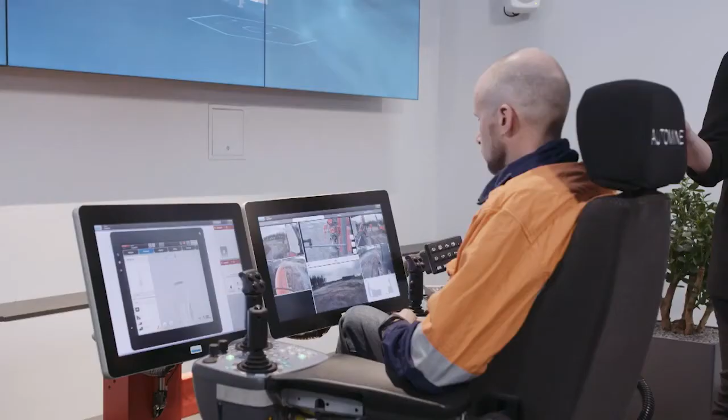Hi everyone, my name is Mervi Helminen and I work as area manager for surface boom drills. With me I have our operator Sami Jartti. Right now we are in our AutoMine showroom, which is located in our test mine in Tampere, Finland. We usually have hundreds of customers visit this room on a yearly basis.

This room is dedicated for demonstrating the capabilities of our AutoMine product family. The AutoMine product family covers all aspects of automation, from remote and autonomous operation of a single piece of equipment to multi-machine control and full fleet automation. The product family consists of two product subgroups, AutoMine Underground and AutoMine Surface Drilling. They both allow customers to scale up automation at their own pace.

Today we will be focusing on our AutoMine Surface Drilling offering. It is an automation system for autonomous and remote operation for Sandvik I-Series surface drill rigs. It aims at improving safety, reducing cost and increasing production. With the help of the autonomous drilling cycle, one operator can control a fleet of drill rigs.

Autonomous drilling can be performed at a remote operator station that can be located anywhere. Now we will show you how we control two Leopard DI650i drill rigs located 2 kilometers away from the comfort of this showroom.

Leopard DI650i is an intelligent high-pressure down-the-hole drill rig for demanding high-capacity production drilling applications in surface mining and large-scale quarry applications. The hole size range is from 115 mm to 229 mm. Leopard DI650i with intelligent platform enables scalable automation and can be adjusted according to customer needs, always up to the highest level automation systems.

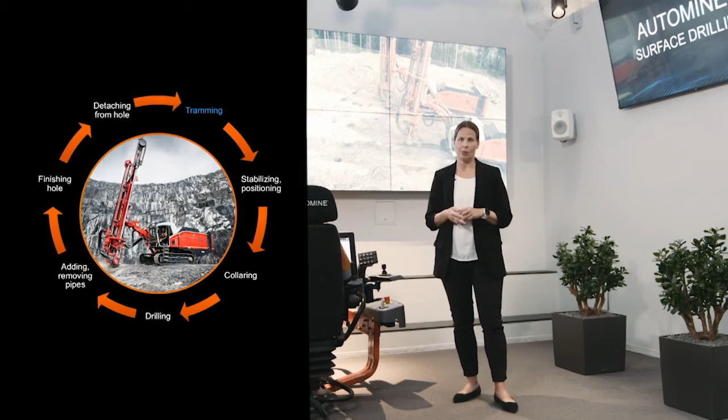Operator selects the sequence of the holes to be drilled from the assigned drill plan. The rig autonomously trams to the next hole using the TIM3D drill navigation and autonomous tramming system to reach the correct drilling spot.

Once the drill rig is on the correct drilling spot, first the carrier is stabilized. The large coverage area and boom reach of the Leopard DI650i support the automatic feed beam alignment and positioning, which in turn ensures accurate hole positioning according to the drill plan.

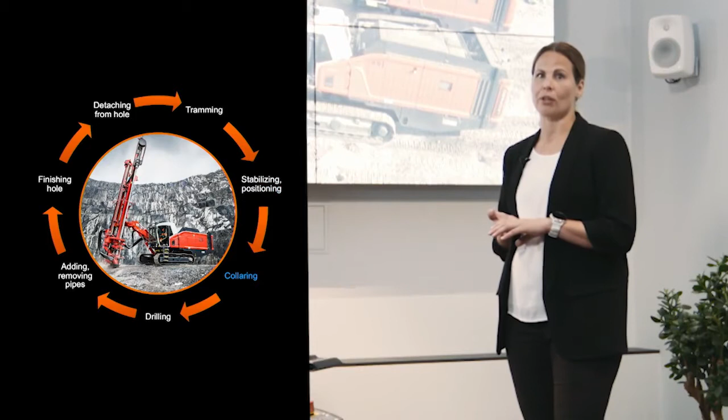The intelligent collaring sequence takes care of perfect hole start. Guide jaws are automatically adjusted to hammer size. Automatic adjustment of low pressure and feed levels optimizes the performance when collaring, making sure that drill hole quality stays at the perfect level.

With full power drilling, the iTorque drilling control system takes care of rotation torque and drilling parameters. The compressor flow control system maintains optimal airflow for the down-the-hole hammer in varying drilling conditions. Pipes will be automatically added until the set drilling depth is reached.

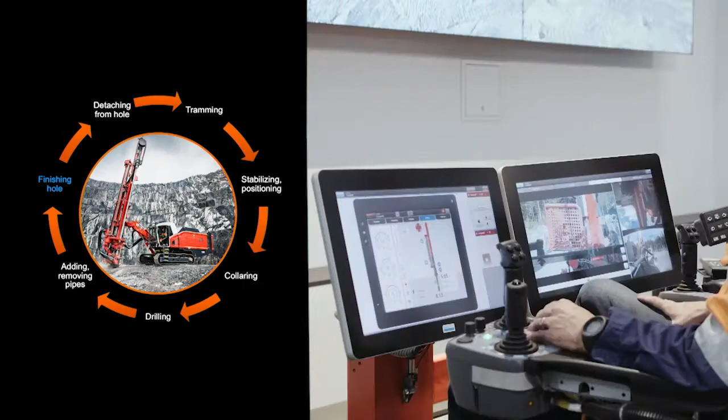After reaching the desired hole depth, the intelligent hole finishing sequence takes care of all steps of finishing the hole in the correct way. It ensures faster and more accurate hole finishing and pipe handling. When the drilling is finished, pipes will be automatically removed, and the rig will prepare to move to the next hole as per the planned drilling sequence. The cycle is now completed and the next one can begin.

What do you think? Pretty impressive, right? This game-changing technology is also available for rotary drills. We will now show you some pre-recorded footage from Alachua of how the AutoMine surface drilling system works with rotary drills.

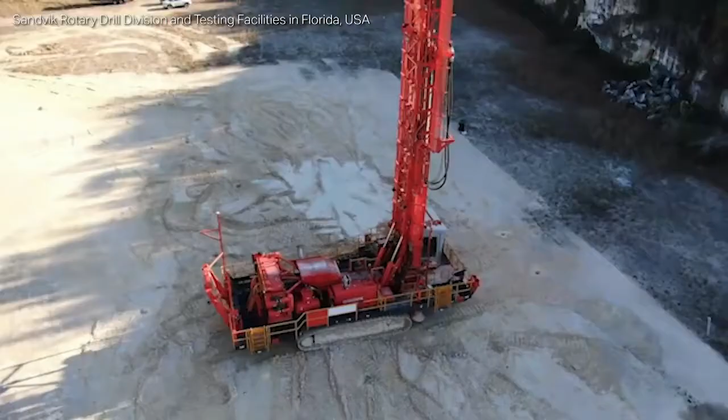With automine surface drilling, you can maximize productivity and safety while increasing drilling efficiency.

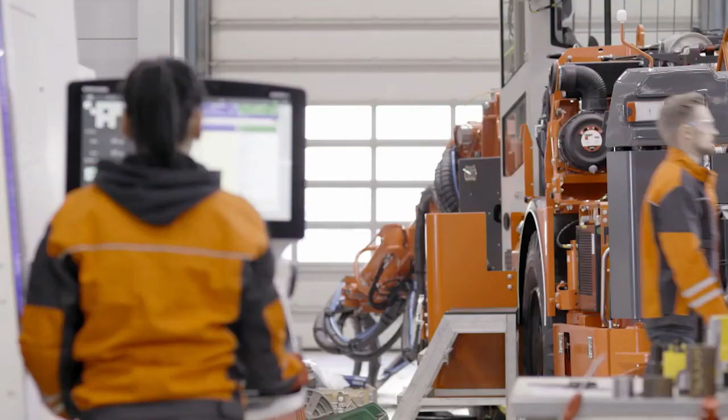On the other hand, we have exclusive expertise, because we are the OEM, with years of experience and knowledge about mining machines and equipment. As an in-house digital services developer, we know the machines and their features thoroughly. This means we can tailor our services to offer exactly the information and features the machines, their owners and their operators need. Hey, very impressive.

Thank you for that. But hey, at the moment, we are in the Productivity and Reliability Center of Sandvik, and this is a very exciting place. Could you give us a sneak peek onto what goes on here? Especially how does your team get connected to your local monitoring specialists around the world?

Sure. You can get the main idea by just looking around here. This is a team of highly skilled data scientists specializing in work related to reliability issues of our machines. They're experienced in monitoring, interpreting, and modeling the big pool of data that we are receiving. They work hand in hand with the local monitoring specialists in the respective sales areas, providing 24-hour support and recommendations and preventative actions to avoid unplanned maintenance.

This looks really impressive, but I'd like to know, could you elaborate on the connection between the global and the local levels, and especially, could you tell us how you can deliver improvements based on data? Our global reliability center is strategically located here in Tampere, close to our equipment factories. But we also have local monitoring centers in the front line and sales areas, for example, Australia, Canada, Mexico.

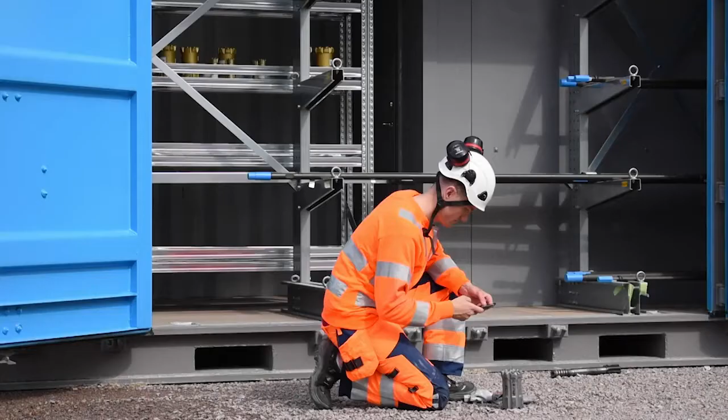So during the summer, my team came up with a unique solution to address this problem, taking advantage of what most people have, a phone with a camera. We created an app called Analyze. It allows all our customers, big and small, access to a Sandvik expert at any time and anywhere in the world, simply put, to understand the problem of a customer and provide recommendations in an application.

All these solutions are great and made even better when you can take advantage of those analytics, and those analytics could revolve around operator training, operator performance, how they use the rock tools.

Previously, before COVID was here, we would normally travel to a site and we'd have classroom training. That classroom training would essentially look at the basics of drilling and how we look after our rock tools. We would focus on percussion, feed, rotation, and air, and look at ways that benefit the operators, how they would use their rock tools more efficiently.

So all that has come to a halt in most countries, and we still see a need to train operators. We cannot do classroom training in a lot of countries, so we needed to find a solution that complements what we have, and we developed the remote training solution.

Essentially, we can train up to 6 operators from anywhere in the world at any time, as long as they have access to the internet and a device to train on. In this way, we can still teach people to use their rock tools correctly.

By taking advantage of the digital tools and solutions we've created, we can impart knowledge onto the sites through your operators to reduce your total drilling cost. And as we say in Sandvik Rock Tools, you'll never work alone.

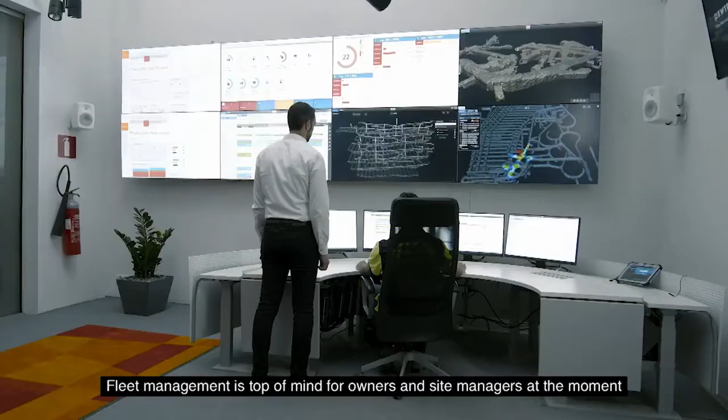Fleet management is top of mind for owners and site managers at the moment, and it has a high-level purpose in the mining and quarry industry. The data from software and sensors is aggregated to give a big picture overview of what's going on. But fleet management software doesn't directly address those with operational roles of the equipment.

Operators are the day-to-day users of the crushing and screening equipment. They are in the trenches, both literally and figuratively. And maintenance managers support the operators indirectly by keeping the equipment in running condition in order to help them deliver the correct amount at the correct time. These are the people keeping the crushing and screening plants running.

When we visit these plants, we normally find that cross-team communication is done with what's at hand and what's available. This could be whiteboards, computer screens, post-it notes, Excel files, emails, and even the use of WhatsApp on personal smartphones for quick communication. Operators, like all of us, use the tools that they're most comfortable with. And I can't count the amount of times I've downloaded an app only to delete it again in a matter of minutes because it was hard to use or comprehend, or it didn't add value to my life.

As consumers, we've all seen firsthand how technology has made a massive impact on our daily lives. 20 years ago, finding a song, movie, or even some basic information online was like going into the Wild West. You never really knew what you were getting or where it was actually coming from. Now we download countless numbers of apps onto our smartphones and computers that make our lives easier and more enjoyable. Netflix, WhatsApp, Spotify, the list goes on and on.

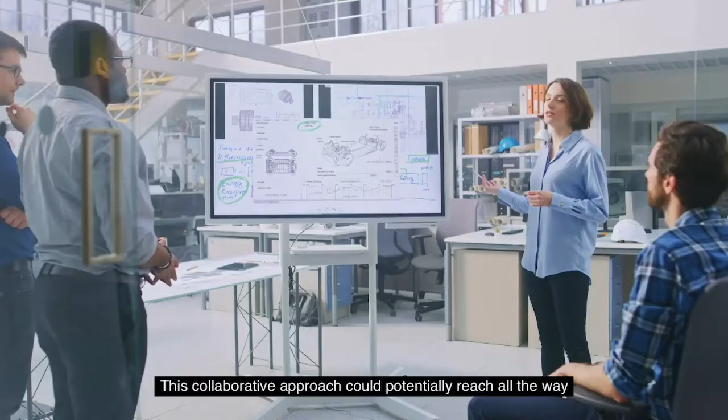If our experts and customers have access to the same tools, they can speak the same language when collaborating. It would provide a better baseline for building knowledge and resolving problems, increasing the lifespan of your equipment. This collaborative approach could potentially reach all the way into our research and development process, creating better, more reliable, and stronger equipment.

And we can't talk about the future of technology without talking about artificial intelligence. Tesla, one of the most prominent drivers of AI technology, has stated that as of February 2020, their cars have driven over 3 billion miles. That data is then used to make their system even smarter, creating a never-ending positive feedback loop that is beneficial not only for Tesla and their drivers, but for everyone that shares the road with their products.

Now, what if we could use AI in mines and quarries to predict your crusher performance, or whether there is an opportunity to increase the output? This positive feedback approach could grow exponentially with the input we would receive from Sandvik customers and machines from all around the world. It would start with a secure, controlled pool of data points from the connected equipment, which would allow us to take a positive feedback approach that could potentially improve productivity for your connected crushers and for connected crushers everywhere, just like the Tesla example.

These are just a few of the ambitious goals that Sandvik has for the future. And soon, we'll be introducing you to a smarter, more dynamic way of working.

And we have the very dynamic Petra Sundström with us. So good to see you again.

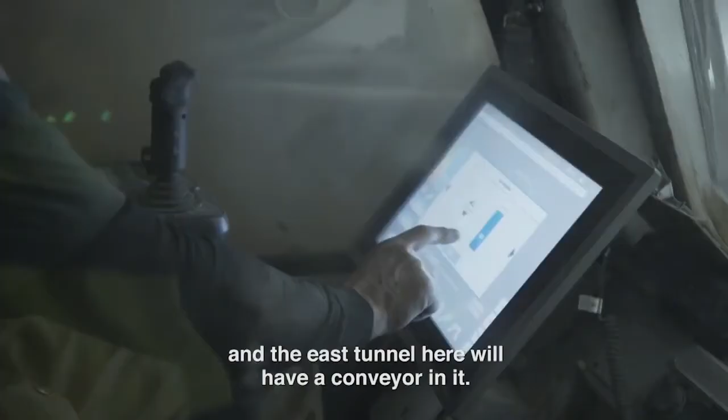The purpose is for Barrick to be able to go deeper, eliminate the high-cost truck haulage out of the existing portals. And the east tunnel here will have a conveyor in it that conveys their rock out at a much cheaper price per ton.

The lead man on this crew, after he first cut with the AutoCut, and Darren's a 30-year mining guy, said, I hate to admit it, but I finally found something electronic that can do a job better than I can. He said, I love the AutoCut, because it just gives you a perfect profile.

So in that application, the system was used to cut a decline where accuracy was obviously very crucial. Have you also used the Cartronic system in a production environment yet? Yes, it's been implemented with other applications too.

For example, we've used it in the German underground salt mines with a roadheader, where the machine is cutting a full sump cycle fully automatically. But here again, I would like to show you a short version of a customer testimonial.

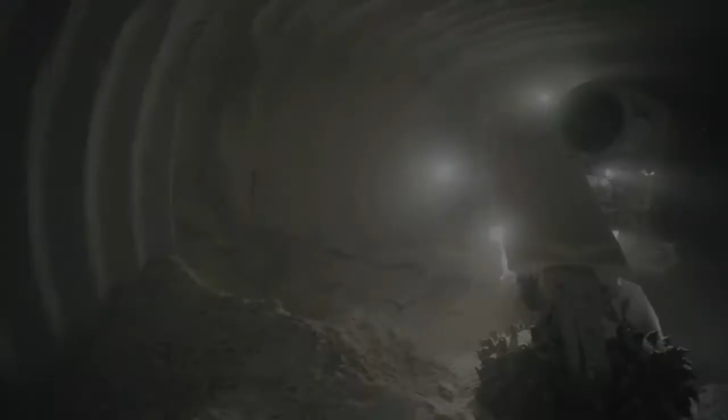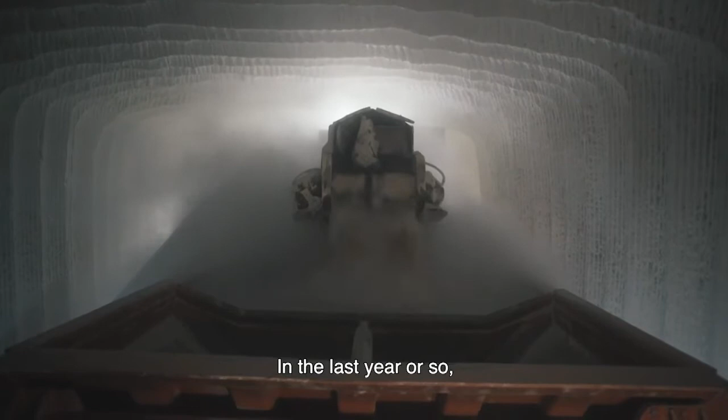So in addition to the fully automatic cutting cycle, we have also implemented a cutting path planning tool, which helps our customers individually plan and optimize the way the cross-section is cut. On top of that, we've implemented a fast profiling tool, which helps especially in tunneling applications where accuracy is of utmost importance. Finally, the Cartronic system increases machine lifetime because it optimizes the way the machines are used, always at nominal levels. Let me show you an illustration of another application where the Cartronic system is implemented on an MB770 bolter miner.

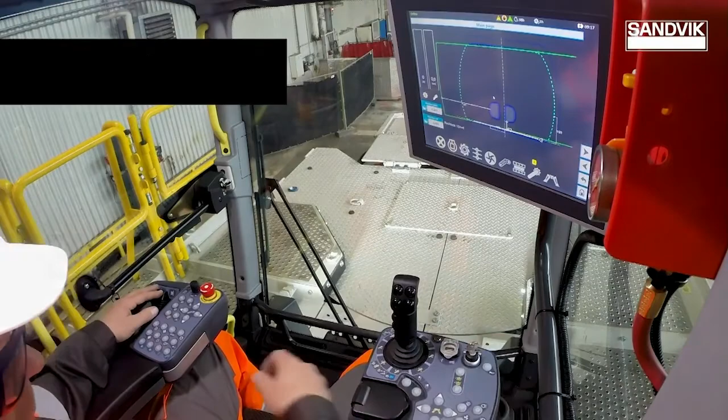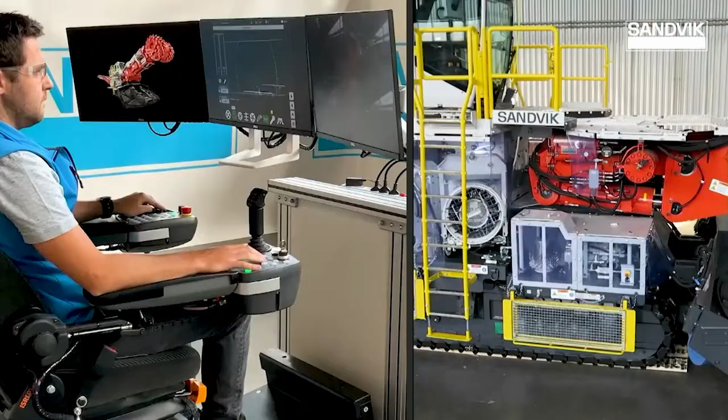Here you see how a roadheader is operated the standard way. On the machine you have a 3-way button which is turned to the tele-remote operation position. Then the operator takes off the key and leaves the cabin. The machine operator takes over control on surface and sets up the machine underground for cutting operation. He trams the machine forward to the tunnel face, puts the rear stabilizers and the loading table down to the tunnel floor, and then he initiates the Cartronic system for automated cutting of 1 full cycle.

When the Cartronic is in action, he takes off his hands from the controls and leans back into the comfortable operator seat. Now you see how smart and easy it is to become a roadheader operator in the future, when you are going to use the tele-remote operation feature now available for your mechanical cutting machines.

Finally, Jürgen, should we speak now about connected equipment, analytics and process optimization? Definitely. We have been working on remote monitoring for several months now. The logical steps when it comes to remote monitoring are as follows: get visibility of your equipment, connect equipment and access data, establish equipment communication either live or at regular intervals.

Then you need to put the data into context and gain service intelligence to help protect and enhance the relationship with the customer and ensure customer satisfaction.

In my view, data on its own does not add much value. It's important to visualize the data in a meaningful context, for example as key performance indicators and alerts. Here in mechanical cutting, we strongly believe we need to pull information from different types of systems in order to understand the whole picture when it comes to system health status, as well as machine availability and performance.

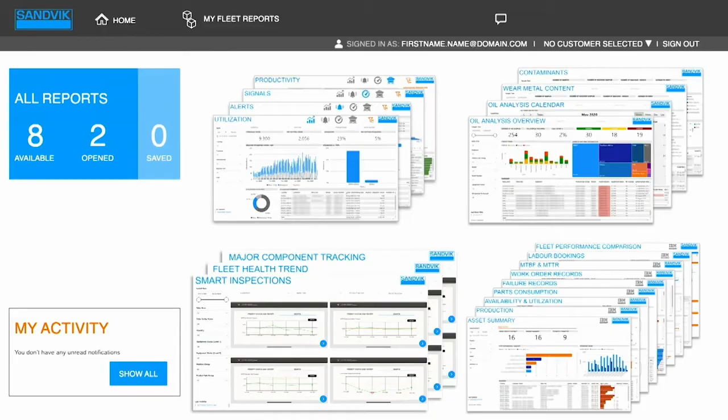To sum it up, with this type of new digital service, the customer can take control of their fleet through remote monitoring and Sandvik's service excellence.

Thank you all for your attention.

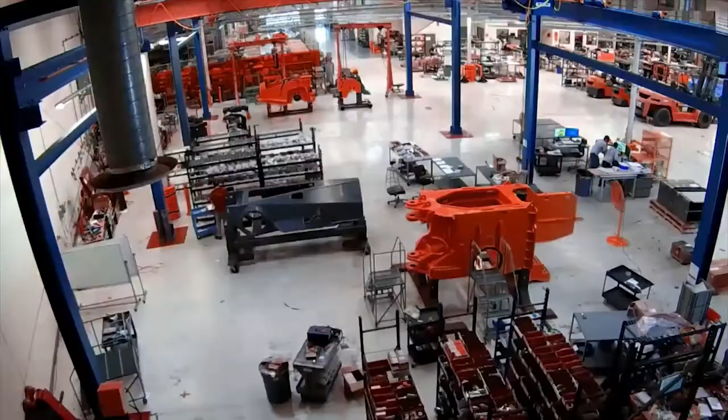We spent 18 years developing battery-powered vehicle solutions. Our systems work in the real world, and when it comes to mining, we have a decade of actual production use underground. That makes us the most experienced BEV team in the mining industry. Combine that with Sandvik's ability to manufacture and support global-ready product, and you can see how the future of underground mining is here today.

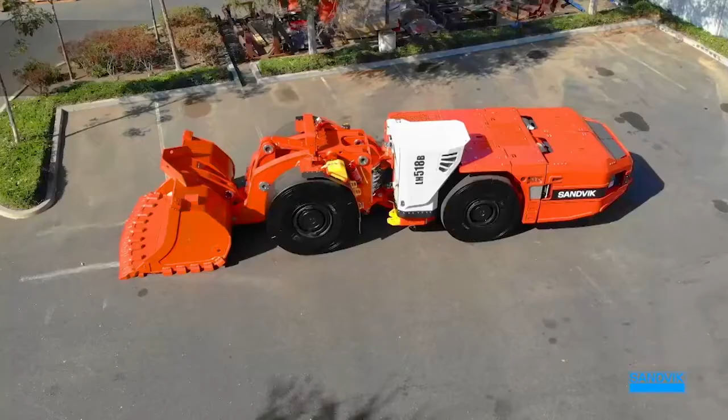I'm now going to turn it over to our VP of Engineering, Kyle Hickey, to tell you more about the features of this amazing new machine. This new machine is a result of Artisan's innovative approach and battery system experience, matched with Sandvik's decades of engineering expertise.

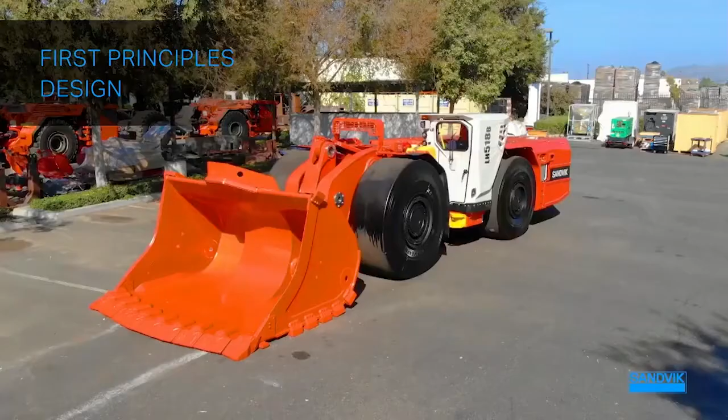We design our machines based on a first principles foundation. Artisan looks at underground mining from a fresh perspective, and we look for ways to leverage the latest technologies in a way that is best suited to solve the unique challenges of this industry. Our design philosophy is centered around productivity first. This is illustrated in our focus on reliability, system redundancy, and cycle optimization.

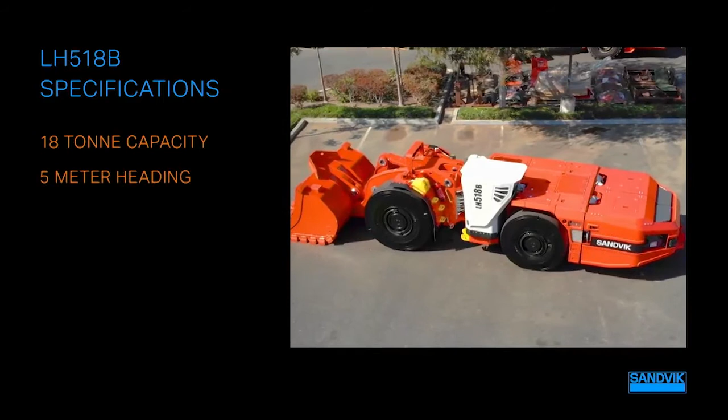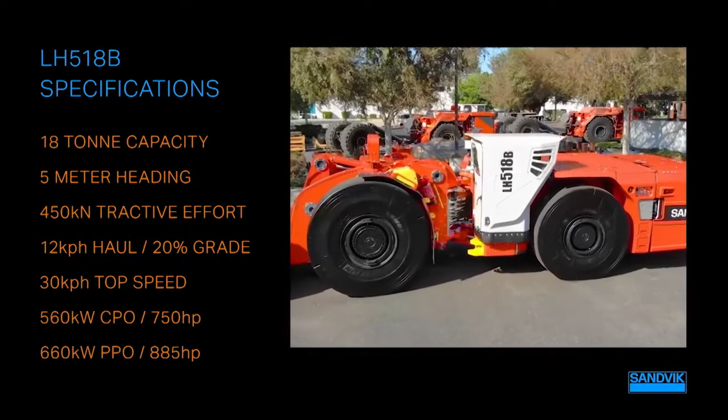Some of the main specifications for the LH518B are an 18-tonne capacity designed for a 5-meter heading. It has 450 kilonewtons of tractive effort. It can do 12 kilometers per hour fully loaded on a 20% grade. It has a 30 kilometer per hour top speed. The machine has 560 kilowatts of continuous power output, which is 750 horsepower, and a peak power output of 660 kilowatts, or 885 horsepower. This machine also has a state-of-the-art operator cabin.

The LH518B utilizes a patented battery swapping system. This system allows the operator to drop off an empty battery and pick up a fully charged battery without getting out of the cabin, allowing for the fastest machine refueling in the industry. The battery system also incorporates a stability system, allowing the battery to be dropped off in any location without any prepared infrastructure. The high voltage battery connections are automated, allowing for the connections to the battery to be done from inside the cabin, significantly decreasing the battery swapping time.

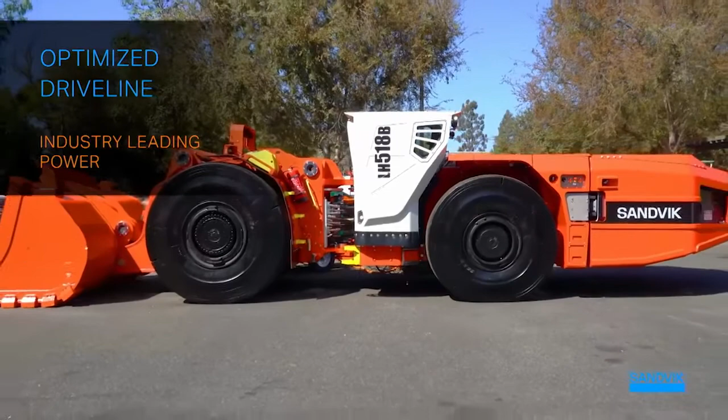The LH518B uses an optimized single-speed driveline design, providing an industry-leading peak power output of 660 kilowatts, pushing the machine up a 20% grade at over 12 kilometers per hour.

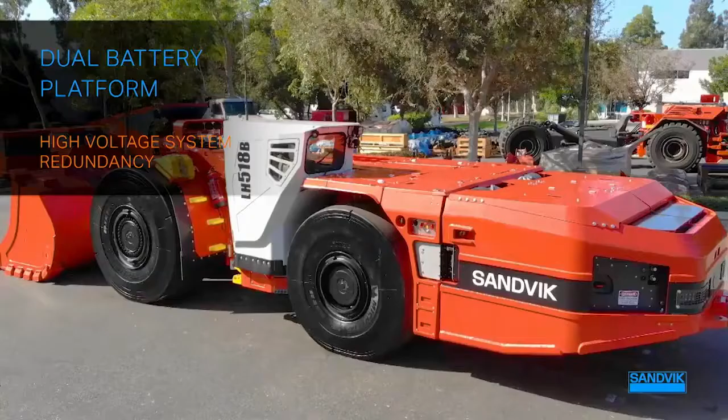Artisan's dual battery platform offers many advantages. The system optimizes efficiency and reliability by offering complete high-voltage system redundancy. In the unlikely event of an issue with one of the high-voltage systems, the machine can operate at 75% of nominal capacity from a single battery. This ensures increased uptime and ensures that the machine never gets stuck in an inconvenient location.

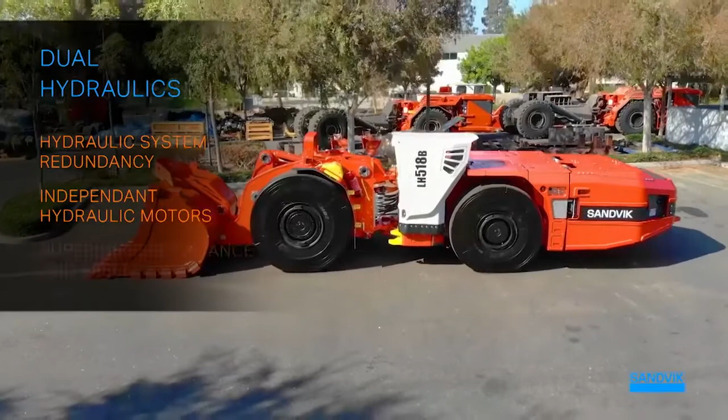Along with our redundant battery architecture, the machine also features redundant primary hydraulic pumps. This allows for increased efficiency and reliability. Because the hydraulic pumps are driven from independent motors, the machine does not lose any tractive power when the hydraulics are engaged at full power. This results in far superior mucking performance and cycle time.

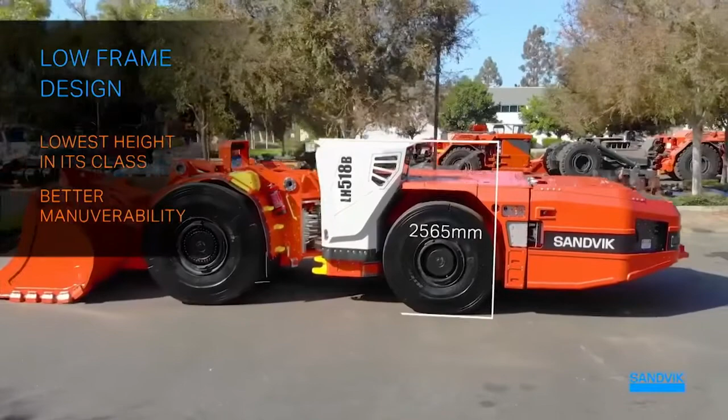The LH518B has been designed with a low overall frame height. This frame height is significantly lower than other machines in this class. This provides for better maneuverability in low back height applications while increasing stability. The use of smaller diameter tires in the rear is an example of how this machine has been optimized for the application. The small rear tires allow for a lower frame height and increased operator visibility.

The LH518B is the world's most advanced battery electric loader. Gen 3, built from the ground up, packed with power and torque for unmatched efficiency and productivity. It's the only battery loader capable of dropping off and picking up its own battery, and it does that while the operator remains safe in the cabin. It will be a very welcome addition to your existing loader fleet.

Next, I'm going to turn it back over to Brian to address some common misconceptions about battery electric vehicles. One common misconception is that there's a real change to infrastructure needed to implement battery technology. The reality is, it's not as hard as you think. With our patented self-swapping system, you don't need a crane, which means you can save a lot on development of that infrastructure. It also means a new charging station can be redeployed and moved within the mine as your operation develops. They're small.

The charging system consists of 3 small cubes that can be transported quite easily, and they use common power infrastructure that's already in place. The other thing is that the swapping strategy means there's an extra battery that's always on the charger. That means the charge rate can be decreased to match the rate of consumption of the machine. So if you have a 3-hour runtime for your machine, you charge in 3 hours and the battery's ready for the swap. That really minimizes the impact on the electrical architecture and decreases your overall wear and tear on the battery as well.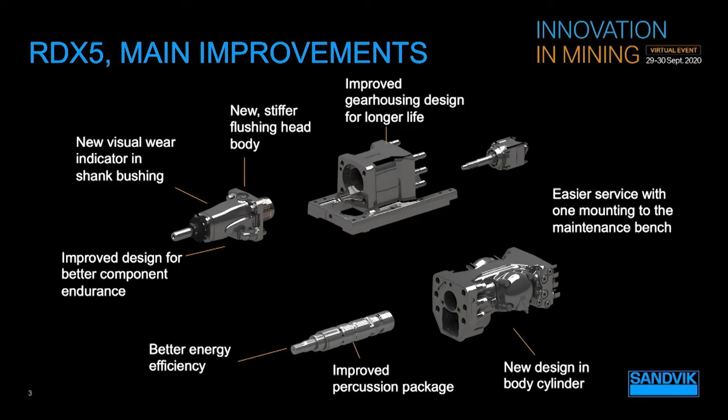For example, the service interval is now 750 hours instead of the earlier 500 hours. Also, drilling efficiency has improved. All this will reduce running costs and increase productivity. As a summary of all the changes, we can say it's the same good old workhorse, but made even better. Sounds great. So Jukka, could you take us through the RockPulse from a digital perspective?

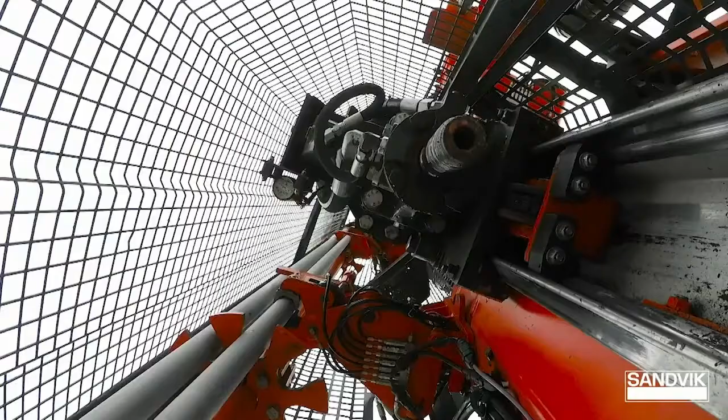Let's have a look at our RockPulse, which is a tool helping to drill right and get quality holes. This is the first practical solution for real-time tool stress monitoring in top hammer drilling. With this tool, one can avoid cases like underfeeding and overfeeding, which shows as improved tool life and hole quality. The system consists of a Sandvik shank adapter and rugged contactless sensor inside the rock drill, and it provides drilling status information for the operator.

Here you can see how the stress waves are traveling along the drill string to break rock. The RockPulse can read these stress waves in real time. It can visualize and alert the status of drilling on three key indicators: drill bit response, tools load, and feed level. The first one, drill bit response, measures the contact quality between the drill bit and the rock.

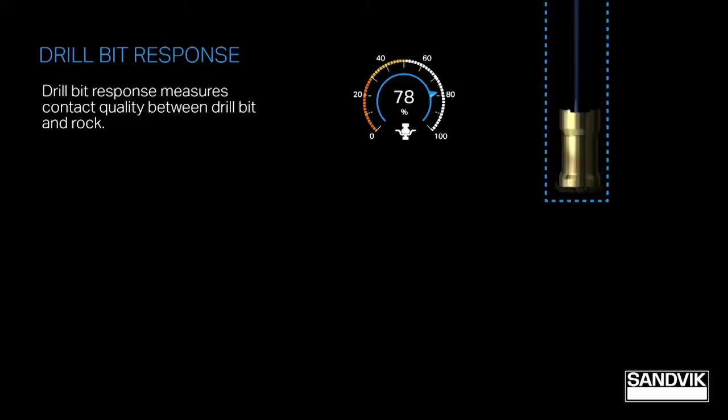This indicator shows whether you are actually hitting a rock or how much energy is being used to break a rock. A higher value here typically leads to a higher penetration rate. The second one, tools load, describes the amount of harmful tensile energy reflected back to the drill string from the rock interface. Low tools load helps the operator save tools and reduce cost.

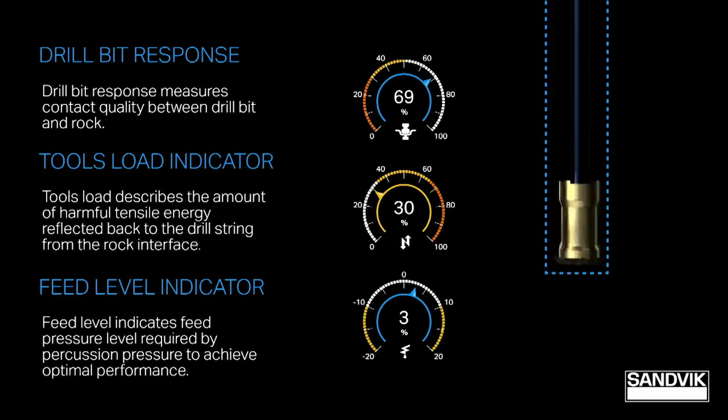The third one, feed level, indicates the feed pressure level required by the current percussion pressure to achieve optimum performance. The optimum feed level gives optimum drilling parameters and helps get straight holes. All in all, we can say that RockPulse helps take your drilling efficiency to another level, maximizing your production while cutting down costs.

Sounds like a great proposition. It is, thank you, Jukka. And now, Jukka, could you take us into the future, a sneak peek into the future please? Why not. Let's take the first one, Top Hammer XL.

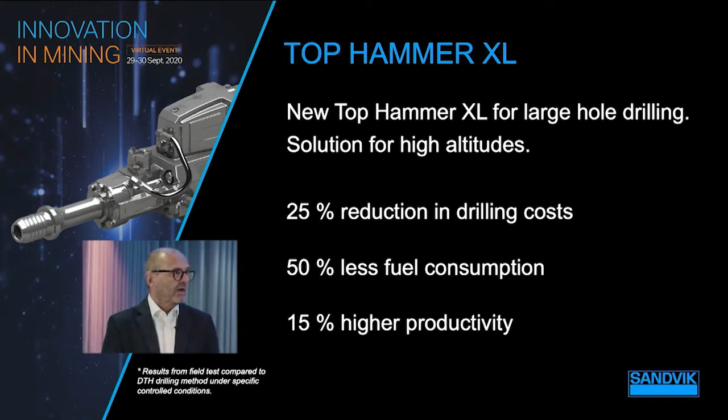We will soon introduce a new XL rock drill for large top hammer drilling. This is a rock drill which will expand the hole size, an excellent choice for mining contractors, which will also include a solution for high altitude operations. In this hole size, drilling means excellent efficiency, less fuel consumption, reduced cost, and improved penetration rate in large hole drilling. In other words, top performance in productivity and costs.

And Jukka, what about the future for the service part of this? We have built this field test lab to guarantee and confirm the quality of the rock drill service provided by Sandvik workshops. The lab will provide automated test reports which confirm the rock drill condition before and after the service.

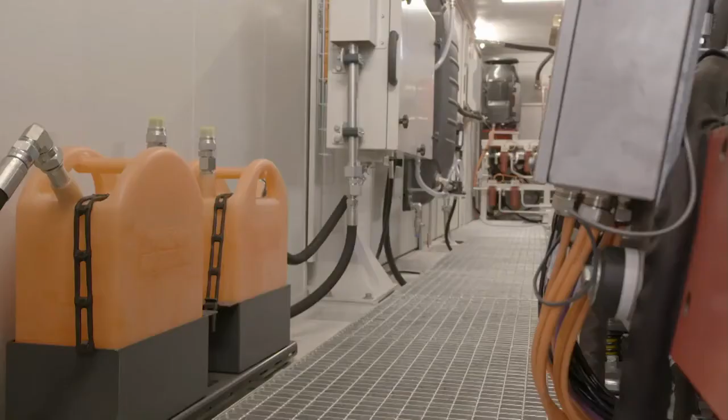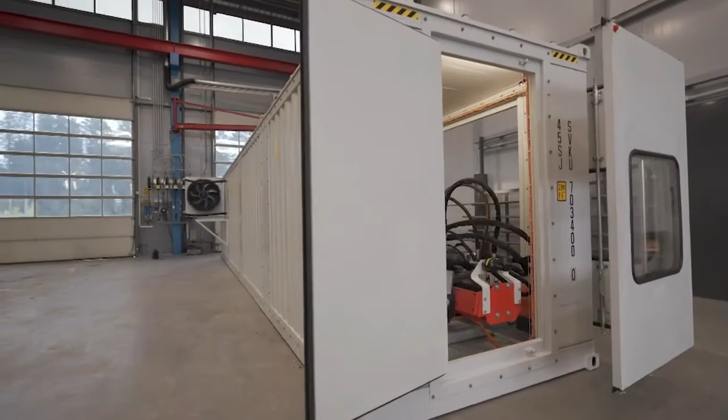It will include the data of general condition and its internal components. This is actually the only one on the market at the moment. The test lab is designed into the purpose-built container. It is movable and it can be placed indoors or outdoors.

So, gentlemen, what is your main message to customers? The main message we want to bring out is that we are constantly developing our products, and all our activities are targeting to help you, our customers, improve your drilling operations. For this work, we need your feedback and input to confirm that we are on the right path. With that said, we'd like to invite you to visit us, see better what we are doing, and talk with us. So you are most welcome to Tampere. Thank you.

Thank you, Jukka and Jukka. And it was indeed a pleasure to come once again to Tampere. I'm gonna miss you guys.

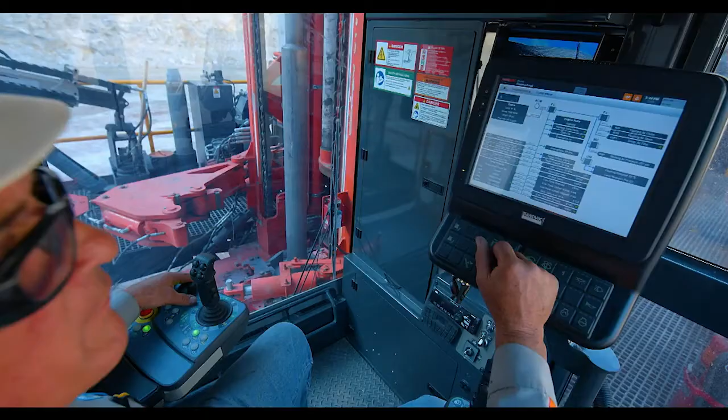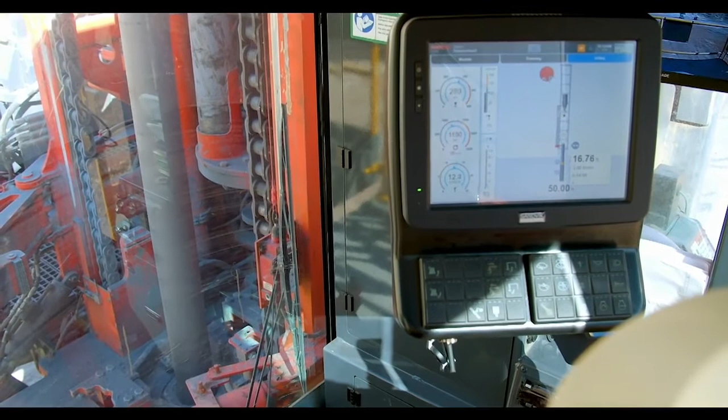We feel we've really managed to leverage the Sandvik SICA control system, which is the overarching control technology used on the I-Series products. That same architecture is used across all Sandvik I-Series products, in boom drills and underground equipment, etc. It's a common platform across all Sandvik equipment. The SICA control system's flexibility has really allowed our engineers to increase the operational efficiency of how the drill operates, and helps reduce our end customers' costs.

How did you identify a market need for a mid-sized rotary drill? Well, first of all, Sandvik's always been very active in this mid-sized market with our existing products. But what we've noticed over the years is a market trend to invest in bigger drills to do the same job, basically over-capitalising for the application requirements. We saw there was an opportunity to deliver a powerful, flexible, mid-sized drill to the market and reduce the need to go up in class and operational costs.

What role did customer feedback play in the development of this new rig? Globally, there was quite a number of customer forums prior to the development of the DR410i, across a range of commodity groups, from coal to metalliferous and gold and copper, etc. Also from mining companies as well as mining contractors, to establish exactly what they require and what were the key drivers for their businesses, and also for their local legislative requirements.

What were some of the key design criteria for this project?

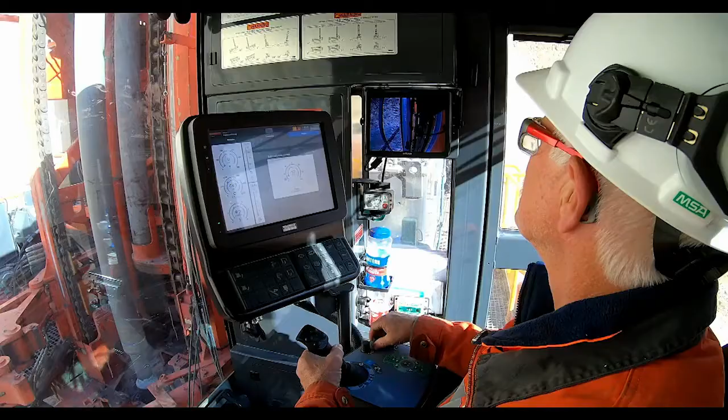On the efficiency side, a lot of work has been done increasing the hydraulic and pneumatic system efficiencies, reducing the actual horsepower requirements. On the operator environment front, we've developed a completely new I-Series ergonomic cab, which has in-seat controls and increased visibility for the operator of all the functions of the drill.

Recently, I was operating our test drill at a mine in Nevada, and I can honestly say the cab is the quietest drill cab I've ever been in.

Our I-Series drills are designed with 4 pillars in mind, and each of these pillars contribute to the overall TCO the drill can deliver. Can you walk us through the pillars? Yeah, certainly, Mary Beth. The foundation of the design of this drill was technology, productivity, maintainability, and sustainability.

On the technology front, we are focused on a technical solution that can add value to the complete excavation process, not just the drilling, from onboard operator assist functions that increase quality and repeatability of the operational cycle, to offboard remote systems and data delivery that can help enhance the downstream process of blasting, loading and hauling.

The productivity focus was on functionalities that actually increase the machine productivity, from leveraging the technology built into the machine, to increasing the single pass capability to a 14 metre clean hole as described before. All of these functions significantly assist in increasing the mine's productivity.

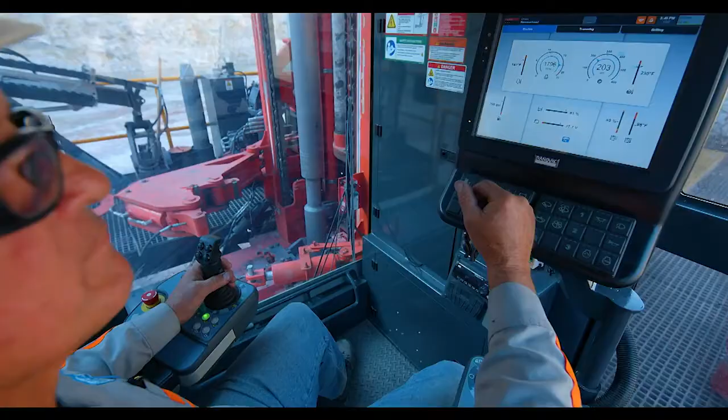As part of the SICA control system, we get intelligent diagnostics which are actually on board the machine. You don't require additional equipment to view them, and it really allows the mine technicians and maintenance people to quickly identify any faults or settings that might need to be adjusted.

From the sustainability perspective, with intelligent pump and power pack controls, the DR410i manages the entire system load to reduce the total energy consumption and the overall carbon footprint of the machine through reduced fuel burn.

And how does our latest I-Series rig help protect mine personnel? On the DR410i, we actually have a dedicated mast access ladder that provides easy access to mast components for inspection and maintenance. There's also certified tie-off points to address working at heights concerns.

Other functionality has been included as well, as we've gone to a non-rust FRP product, fiberglass reinforced grating, which is used throughout the machine to improve the footing and rust resistance of all the work areas.

There's also a patented deck wrench which allows bit change in conjunction with an optional remote control crane system. This eliminates manual bit handling and reduces the risk of potential injury for operators or maintenance personnel.

How does the DR410i help customers improve productivity? Well, from onboard automation features like auto drill and auto cycle, all help improve consistency and quality from hole to hole. The addition of the 14 metre mast concept means a lot of the mines actually won't be changing pipes to complete their drilling cycle, which will also help increase the productivity of the operation.

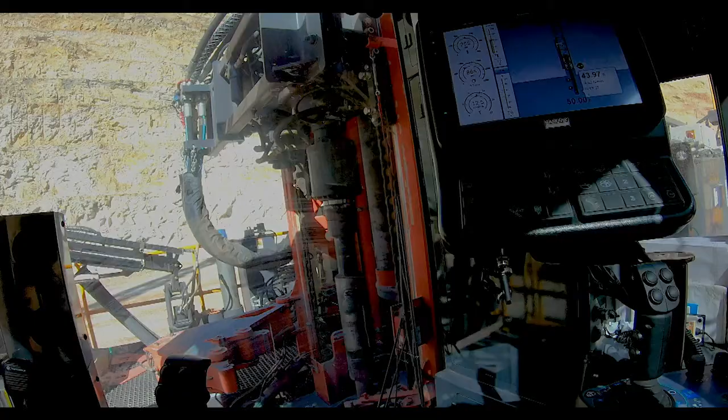We were very fortunate to have an excellent testing partner in Nevada, and it afforded us the luxury of having a long-term testing environment to work in. In fact, I think we drilled over 300,000 feet in the testing, and the machine has performed really well.

The client feedback on the rig has been really positive, and their inputs into the DR410i have really assisted us in developing this product. I was actually with a driller when I was last on site, and he described the drill as an engineering marvel compared to the equipment he's currently using.

The Sandvik DR410i is automation ready, but it's also a scalable solution, ranging from onboard automation that increases drilling efficiencies to fully autonomous operation that gives our customers the ultimate flexibility. It's designed to meet customer needs today, but also to help meet their future needs as they arrive tomorrow. The scalability is one of the biggest differences between our legacy blast hole drills and our new DR400i series equipment. You can use as much of the technology as you need now, knowing there's more available when and if you need it.

The technologies we're working with now are really driving mining towards complete fully autonomous cycles. This is coupled with a massive appetite for data to interconnect throughout the complete mining process. The future is an exciting time in the world of drilling. Sandvik will continue to be at the forefront of not only the smart equipment and smart tooling systems that go with that equipment, but importantly, the data management and the willingness to integrate with third-party systems in the whole mine ecosystem.

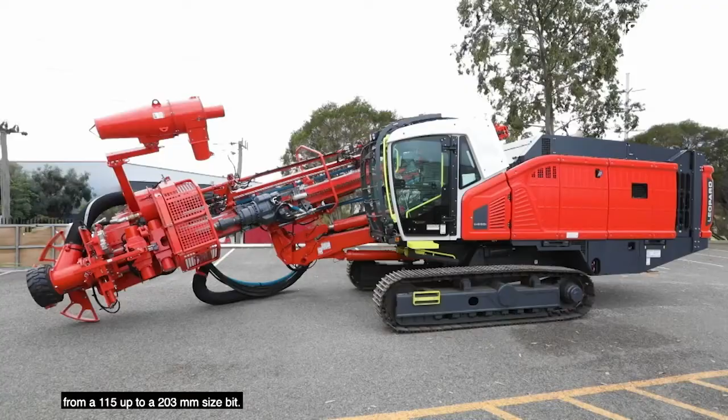SRG Global is a drill and blast company operating all over Australia. We chose the DI650i Leopard due to its capability, operator friendly, maintenance friendly, and it's a cost-effective machine to run. Very versatile - we can run the machine from 115 up to a 203mm size bit. We can bring emissions down, and we offer good savings with the machine with fuel savings and being able to reduce some of the labour costs on site.

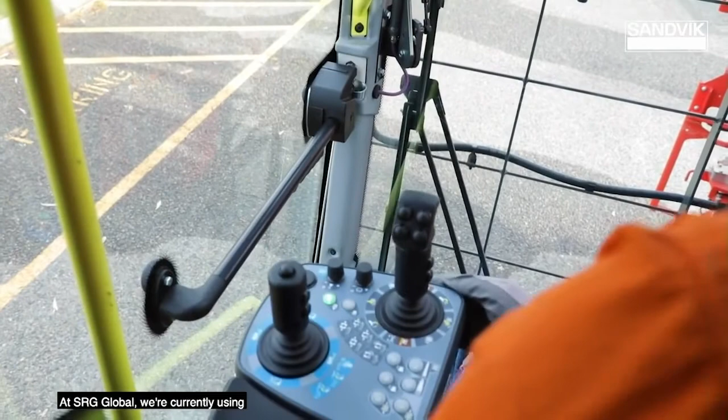At SRG Global, we're currently using the Sandvik TIM 3D hole navigation system. This helps improve the mine planning and gives us a better end result with our blasting and pattern design. So it puts us in the right area where the client wants us for quality assurance also.

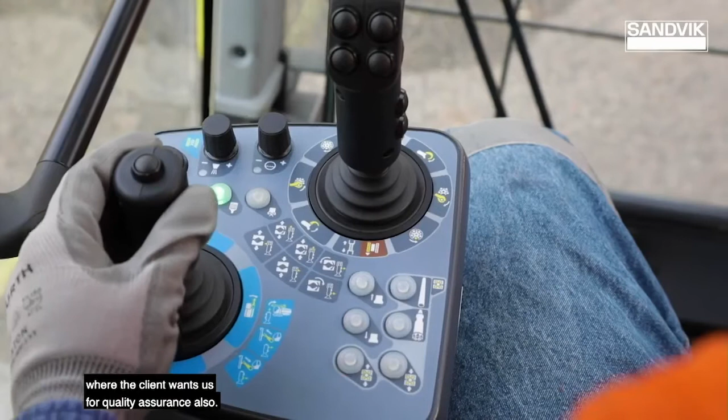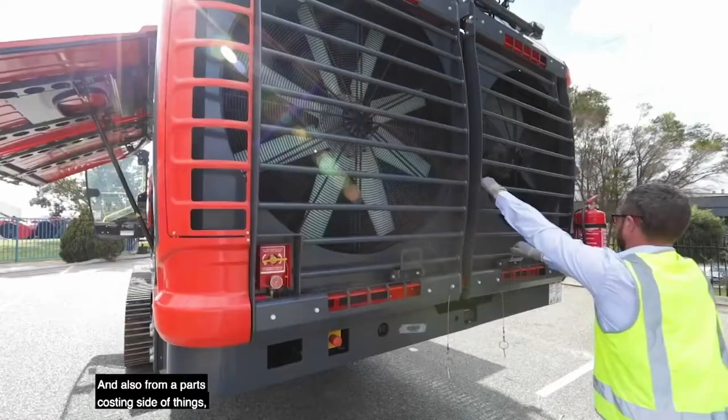In terms of technology, the DI650i has a very similar platform to the DP1500i and the 412. They all use the SICA control platform. So it's very easy for operators to pick up one machine to another, and also from a parts costing side of things, a lot of the parts are compatible and interchangeable as well.

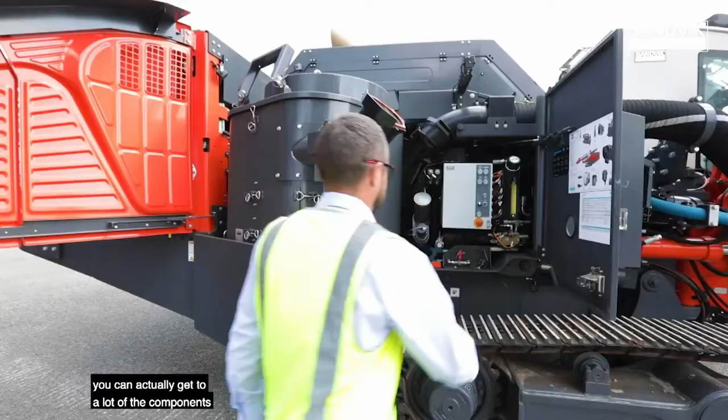A big selling point for the Leopard from a maintenance perspective is the accessibility to the engine, and on the other side of the machine you can also get to a lot of the components needed for maintenance, weekly and monthly planning processes. It obviously reduces the risk of injury for the fitters because everything's more accessible.

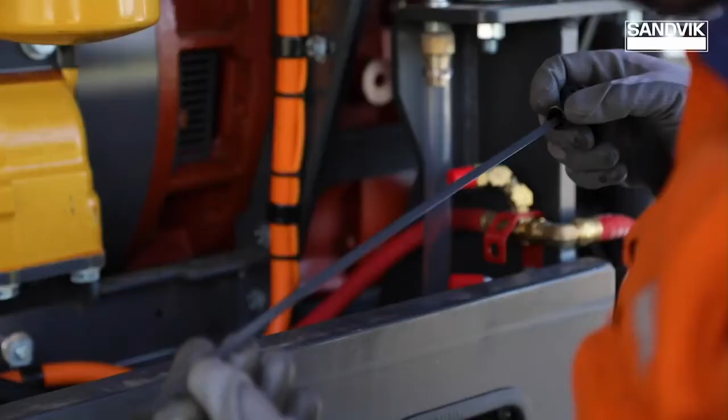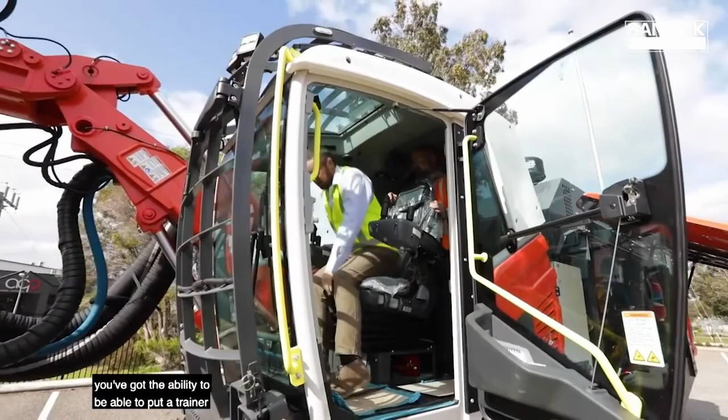From an operator's perspective, they actually like the new style iCab. It's got great ergonomics, and also from a training perspective, you've got the ability to put a trainer in the back and step by step train the operators. With these particular machines, the controls are very similar between the DPi range and this range, so from an operator's point of view, they can transfer between multiple machines with ease.

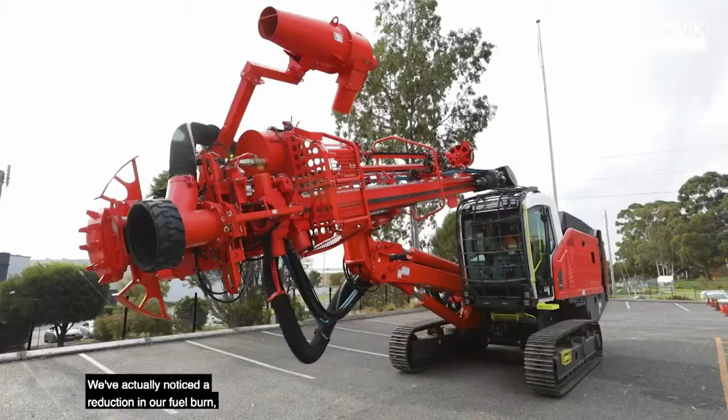These are sustainable machines to have within your fleet. We've actually noticed a reduction in our fuel burn, which is a good cost saving to the client. At the same time, with the fuel saving, you can reduce the load on the components on the machine. You've also got the compressor flow control circuit on there, which takes a lot of load off the machine. There's multiple ways, and with the smarts of the machine, it helps the driller take load off the machine when it's not needed, and lets you know when you're doing the wrong things. So yeah, they are sustainable to have for sure.

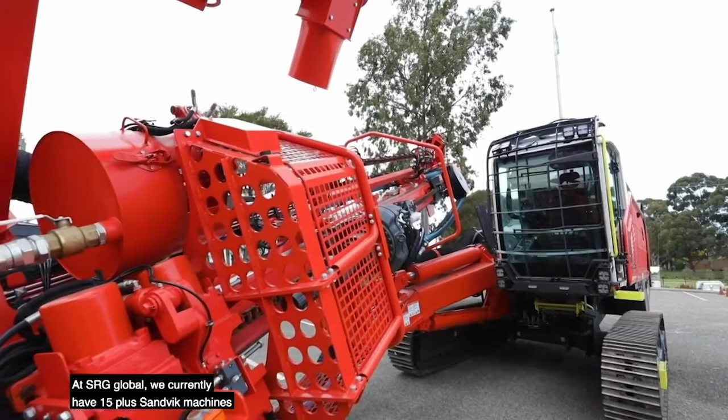At SRG Global, we currently have 15 plus Sandvik machines within our fleet. We're looking forward to building the future with Sandvik. They offer us a good solution for where we want to be within the mining business, and they're prepared to build a future with us as well.

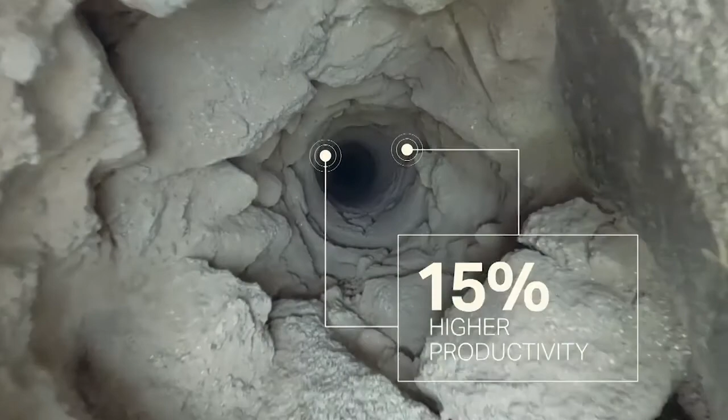Wouldn't it be great if you could broaden your outcome and reduce the cost of drilling by 25%? We are breaking new ground in the industry by radically reducing CO2 emissions while increasing your productivity. It's time for a new perspective, because a marginal difference can open up a world of possibilities.

Thank you, Shane, for sharing that experience with the Leopard. Wow, what a machine. Well, we now tune into an interview conducted by Sandvik's communication specialist, Anne Björk, with some of the company's brightest minds on intelligent training and tele-remote underground drilling operations: Shweta Iyer, Pasi Salonen, and Jukka Naapuri.

Learning anywhere at any time with Sandvik's digital driller. Sandvik Mining and Rock Technology recently introduced an operator training digital driller to provide a compact and flexible solution to safely train operators or maintenance teams. The drill rig delivers real-life training in a simulated work environment, with drill rig operators and maintenance teams learning about the drill rig capabilities before moving on to the actual equipment. The simulator acts like a real rig and operates with authentic controls combined with the same control system software as the ones installed on the drills themselves.

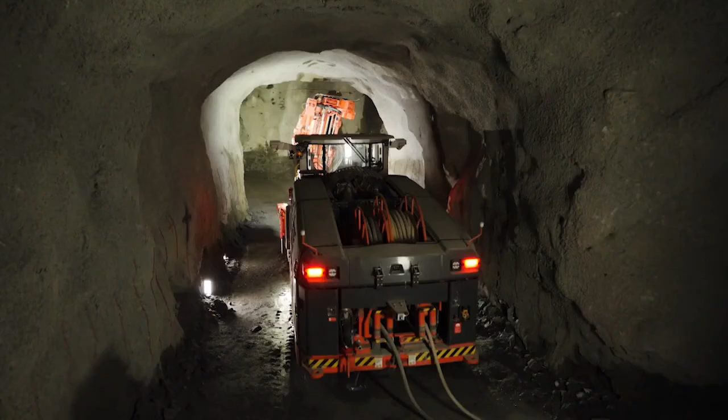Success in teleremote operation depends on how the different stopes in the mine are covered with wireless network, the available network bandwidth and latency. A mining company in Canada is operating remotely their DL432i in a mine 150 kilometers from their head office.

So Jukka, would you say that drilling automation is often used together with teleremote operation? The drill can be operated in automated and unmanned mode during work shifts, breaks and shift changes. One-hole and fan automation are often utilized. Product safety is improved as operator presence on the unit is required only for a short period of time.

So what happens now when the fan is actually completed? Once the drilling is completed, the control system creates a data file which can be viewed by the operator before it's downloaded on a USB stick or wirelessly.

Shweta, what are your feelings now after this journey you've made from digital training to teleremote operations? It would have been nice to drill a couple of fans from the cabin also before coming to the teleremote bench. I say so because the camera views are different to real. Overall, this was a great and exciting experience.

Many mining companies and contractors are constantly looking for possibilities to utilize new technologies in their operations in order to better utilize the investments in terms of equipment and human resources for boosting the overall operational productivity. In order to get the most out of your fleet, the new highly effective drilling solutions, Sandvik has developed a training solution combining efficiency and flexibility.

As we have seen, the digital driller provides a highly flexible solution for safely trained drill operators. It provides comprehensive operators training of the drill control system, conducted in an environment identical to the real equipment, supporting drill experiences in varying and difficult rock conditions.

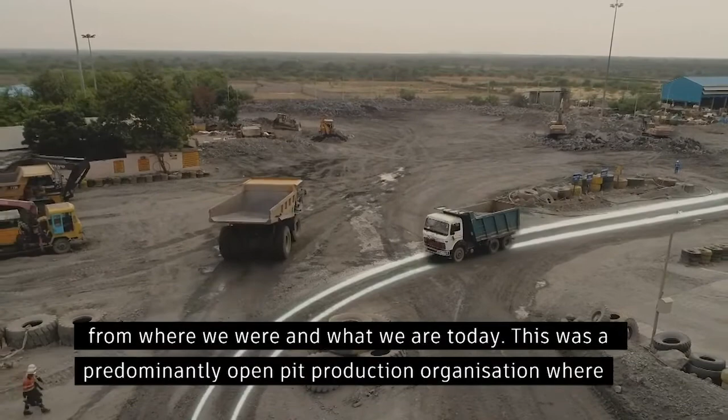In Hindustan Zinc, last 10 years, as you rightly said, we have tried to transform the organization from where we were and what we are today. This was predominantly an open pit production organization where 90% of the metal used to come from open pit. And when the open pit was going deep, we had no option but to transition to underground, and by way of transitioning to underground at one of our mines, we had the opportunity of going underground in all our other mines and ramping up the production so that we can sustain our production of 1 million ton and grow to 1.2 million ton. So we were a novice organization, and we had no knowledge how to ramp up the underground operation.

So what we did, we partnered with an organization like Sandvik, and we entered into a strategic kind of partnership, and we were learning. We set up simulators and training academies, and Sandvik truly helped us to set up this organization, and we developed the skill of the people. But still there were events happening underground, and this was not helping us to ramp up our production.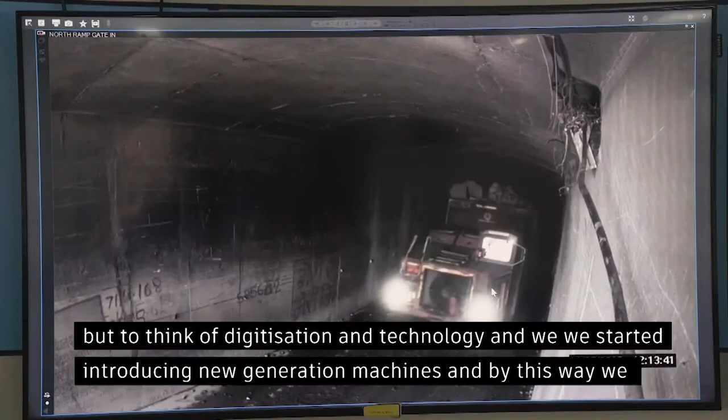So we had no option but to think of digitization and technology, and we started introducing new generation machines. And by this way, we gained by way of removing the hazards. We also benefited by reducing the number of incidents which happened underground. It improved the confidence of the people who were working underground. This all resulted in reducing the cycle time. It also helped us to improve the quality of work, by way of which the safety of the people improved.

And by this way, we could ramp up to where we are today, because of initiatives like digitization and technology. Thank you. And how do you think Sandvik has supported you in this journey towards excellence?

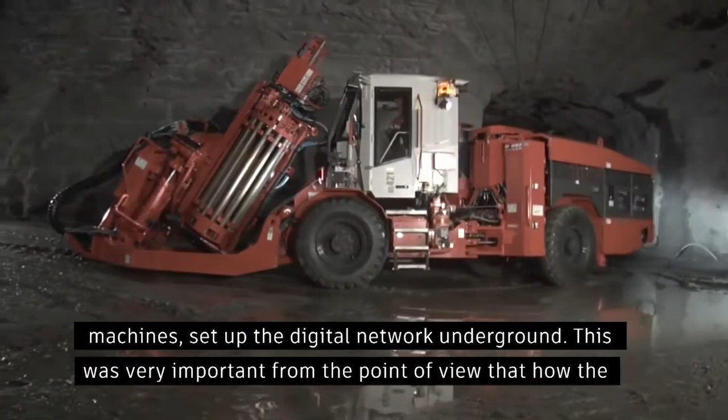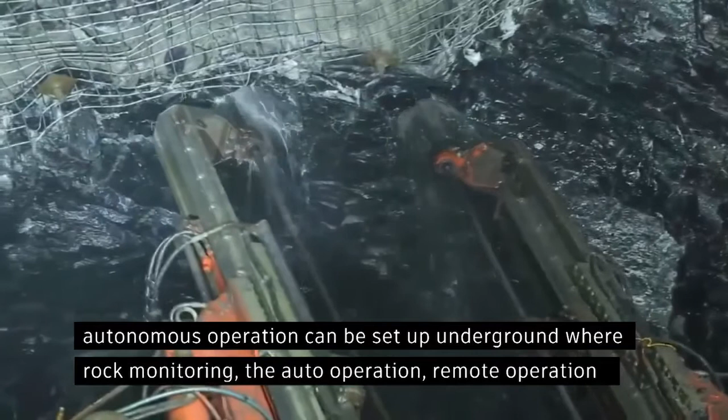As I said, we started partnering with global partners like Sandvik, and we tried bringing new technology machines and setting up the digital network underground. This was very important from the point of view of how autonomous operations could be set up underground, where rock monitoring, auto operation, and remote operation could be done. It also improved the quality of work.

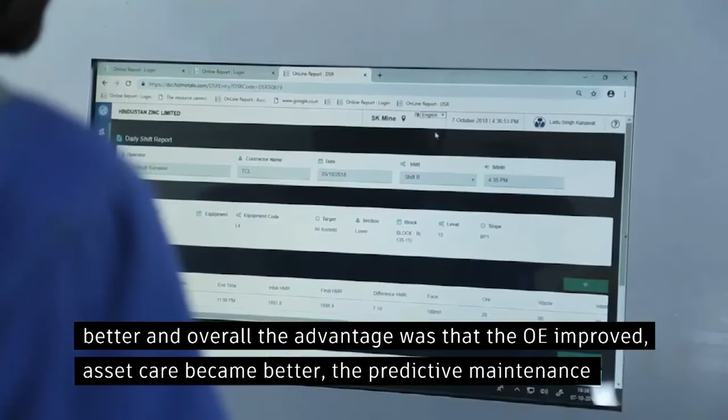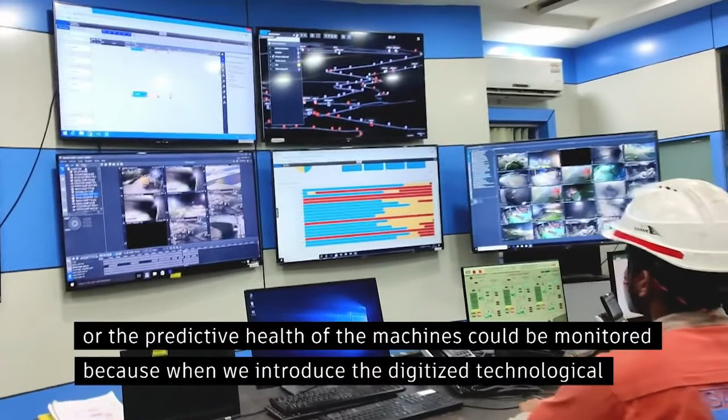By setting up the digital network underground and introducing technology machines, auto operation could be done, remote operation could be done, even the machines could be operated from the surface. Overall, shift hours utilization became better, and the advantage was that OE improved, asset care became better, and predictive maintenance or predictive health of the machines could be monitored. When we introduced the digitized technological machines, this could be monitored through the network, and the health of the machine could be monitored, by way of which the availability of the machines went up, cycle time reduced, overall OE improved, and because of which productivity went up and cost came down.

Still, we are trying to replicate the similar model in all our mines, by way of which we'll be able to cut our cost to the extent of 20 to 30%, improve our OE by around 10 to 15%, improve our productivity to the extent of 30 to 40%. It will help us to further grow and improve our operations and ramp up our production from current 1.2 million ton to 1.5 million ton.

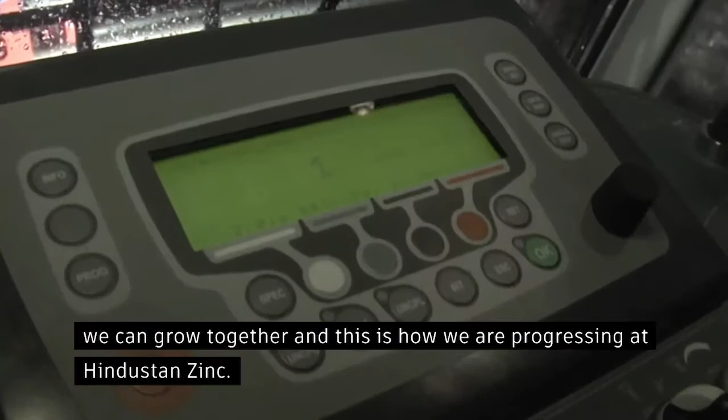As new machines are being introduced by Sandvik, we are partnering with them to introduce even higher technological machines so that further improvement in productivity and OE takes place, and it helps us to grow. We can partner together, we can grow together, and this is how we are progressing at Hindustan Zinc.

And finally, how do you think OEMs like Sandvik can help big organizations like Vedanta? Thank you, Andre, this is a good question. You already know that because of the strategic partnership we had with Sandvik over the last decade, it has helped us to grow and to raise our production, improve our top line and bottom line.

This has also helped us because Sandvik R&D has worked very closely with Hindustan Zinc to find out the need - what kind of machine could be developed, what are the operational hazards, what are the operational requirements, what is the skill level of the people - and they fine tune and make the machines as per the requirement of our organization. This has definitely helped us to grow.

I wish that this partnership could go on for some more decades and our coexistence remains and we grow together. Thanks for all that Sandvik has done for us. All the best. Thank you, Mr. Dugal.

That Vedanta Group, what a phenomenal organization. And finally, we end our session today here on the main stage with the hottest topic in mining: data. Not data mining per se, but rather data in mining. There are both risks and opportunities to the use of data in every industry. Here, to take us on a tour of the data risks and rewards, is the General Counsel at Sandvik, Manny Maloney. The floor is yours.

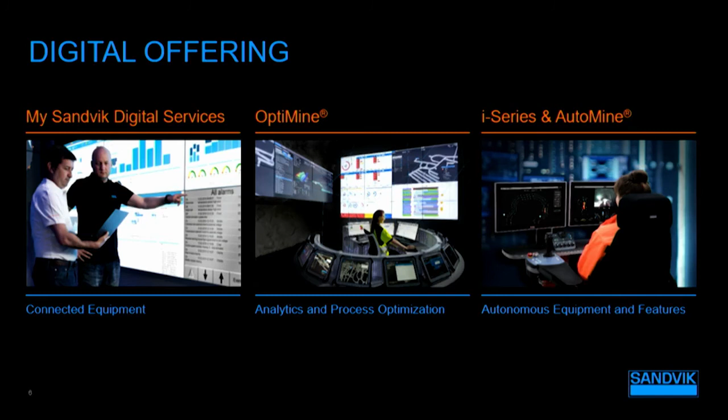So what is Sandvik doing to address these risks? We very quickly wanted to address today that Sandvik is cognizant that these are the things our customers are concerned with. So we've developed a very detailed cybersecurity strategy, which has been deployed and implemented in both our new product development and our existing offering.

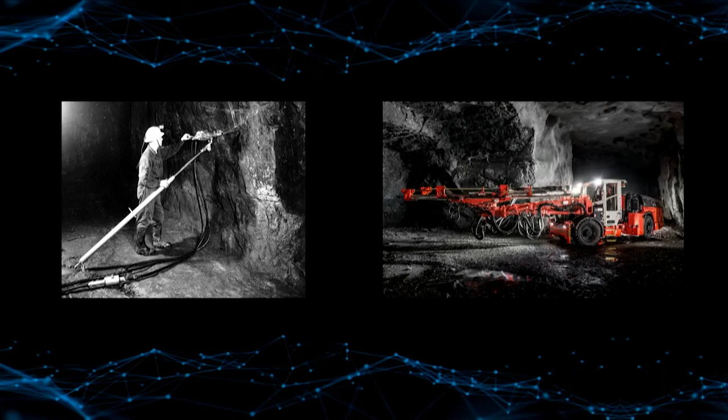To sum up, hopefully we've been able to show you the tremendous opportunities which we believe our customers can leverage from data, but also that there are associated risks which need to be controlled and managed. We at Sandvik are very excited to be supporting our customers as they transition from the mechanical age to the digitalisation age. Thank you very much.

Well, ladies and gentlemen, we've come to the end of a fantastic two days, a festival of innovation in mining. And it seems that at the end of these two wonderful days, this industry has gotten under my skin and also a little bit over my skin. Ladies and gentlemen, it is so wonderful to have been part of this journey with you. I feel that I am also part of this global movement to digitalize and modernize the global mining industry.